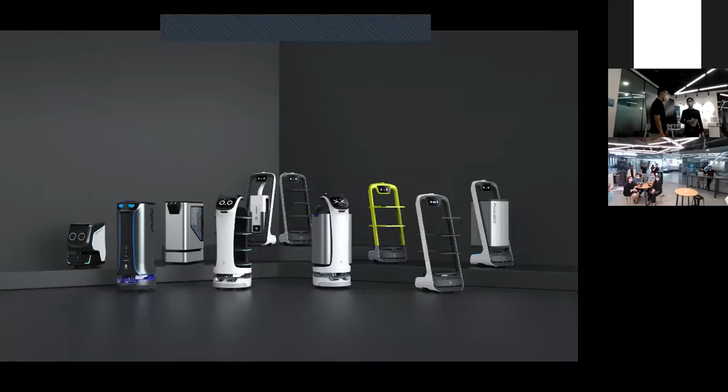So you can see that we have a few different brands we are working together with. Coming to the end of 2020, we became the sole distributor of this brand called Pudu. So these are the series of products that Pudu is producing, and I would say they're kind of a DJI for robots, because their product is super nice, and you can see the quality. I can show you later.

In the beginning of the business, we were facing a lot of questions, like customers asking, who are your customers, who are the use cases locally? Last time we could only show them, oh, in China there are so many companies using it, but coming to this year, we're proudly saying we have a lot of local brands using our products in Singapore. Especially, we have some very reputable brands like Asia Grand, Imperial Treasure, and Swee Choon using our product. Of course, Haidilao too, right? Haidilao is using it worldwide.

Surprisingly, they're actually using more than 1,000 robots worldwide in the F&B outlets. And then recently we also have some hotels starting to use our robots, yeah, in the testing phase.

So these are the few models we are focusing on today. First of all, is the Pudu Box, Bella Bot, and Hola Bot. So these are the 4 different models, and different models for different purposes. We can elaborate further later.

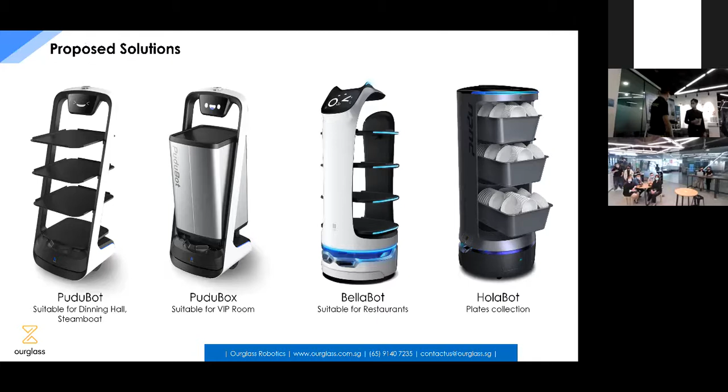As you can see, these are some of the local cases here. We got their approval, so we are able to use their brand together with our robot. I have Shin Minori, one of the first customers in Singapore using robots, and then Raffles Marina, and Swee Choon.

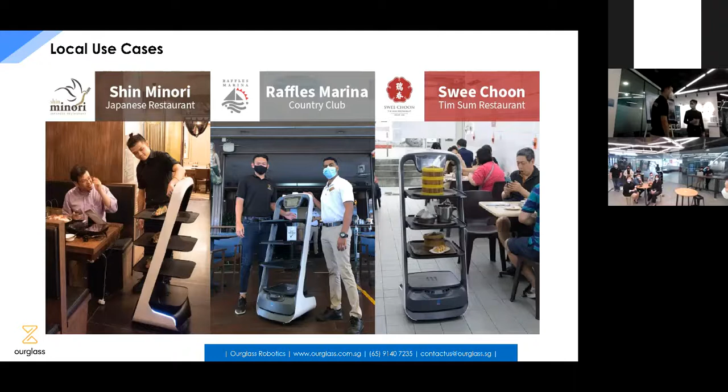So we start with a simple video, right? This is a box.

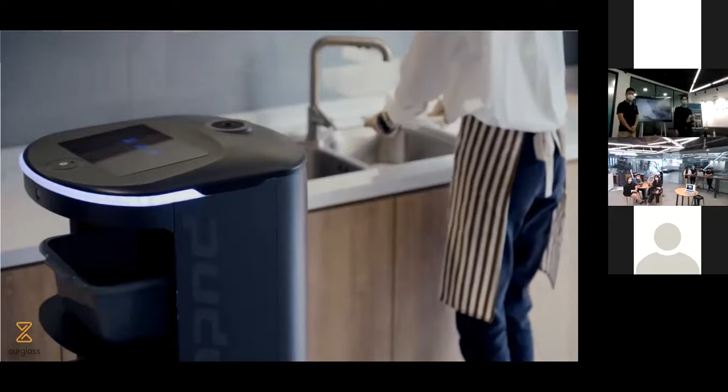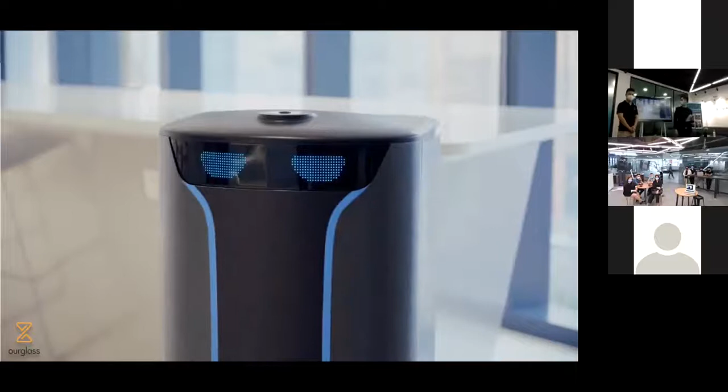This is a HolaBot. We also have a HolaBot in our office, so we can show you a demo later. The advantage of the HolaBot is that it's able to collect plates, and we can use a device, like a watch, to call the robot, so we don't have to go over to get the robot and bring it over. That's the difference. It depends on your business model and your operation processes, and then we can see how this robot can fit into your process.

We talk about one word, process. Nowadays a lot of industries talk about another word called lean. When we talk about how to be lean, the first thing we need to look at is the process. In a restaurant, we talk about a very simple process: getting the food from the kitchen to the table. First, when someone orders food, the kitchen starts preparing it. Once the food is prepared, the waiter walks to the kitchen, gets the food, walks to the table, and serves it. Most people think there's nothing wrong there.

The issue is, what the customer is paying for is preparing the food and serving the food, because that's what they want. They're not paying for delivery. So sometimes customers say, I'm focused on service, I don't need a robot. But the thing is, when your people are running around getting the food, are they in front of the customer? The answer is no, because they're getting the food. So very often in the restaurant, we're waiting for the waiter, and the waiter says, I'm busy, I'm getting the food. But the customer experiences that as, your service is lousy. That's the feedback. So how do we solve that?

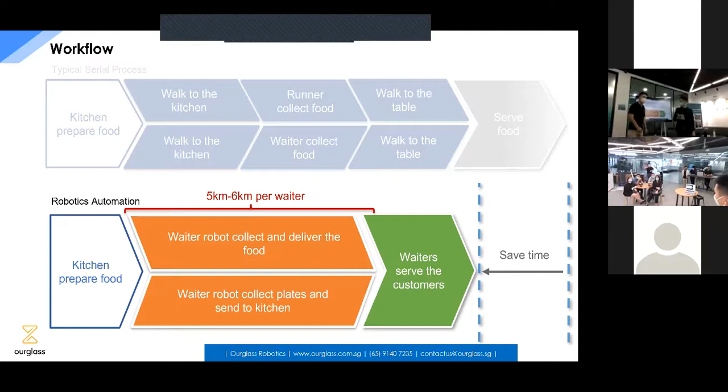We take the simple work that doesn't really add value to your business operation and get it automated using a robot. If we calculate how much walking distance a human does every day, it can be 5,000 to 6,000 meters per day. We get that automated, and then your waiter can be more present in front of the customer, and overall it's saving time. So we get it automated, so your business can be more lean.

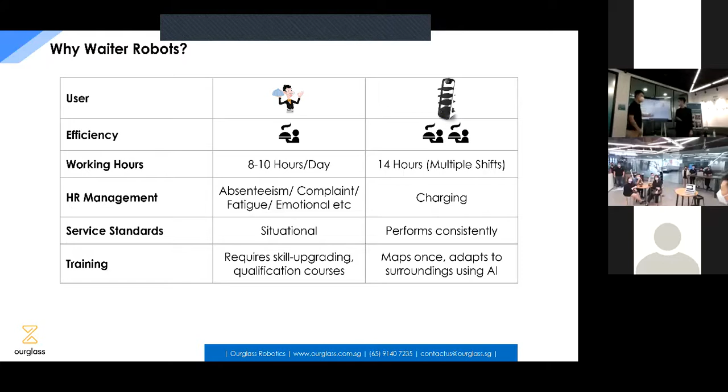If you compare a robot and a human, what's the difference? A human works 8 to 10 hours per day, and every week we have 2 days rest, Saturday and Sunday, plus annual leave, MC, and all this. If we add it up, I did a calculation - there are about 120 days in a year a human is resting, not even considering the 8 hours per day off. In terms of days, it's so long - it's like half of the working time is actually resting. Now it's about 1/3 of the year.

If you are using a robot, it naturally increases the working duration by half already. And if we consider the working hours, the robot is working way longer - you don't have to hire 2 shifts. One shift, the robot can work continuously, 365 days a year. So this is the difference.

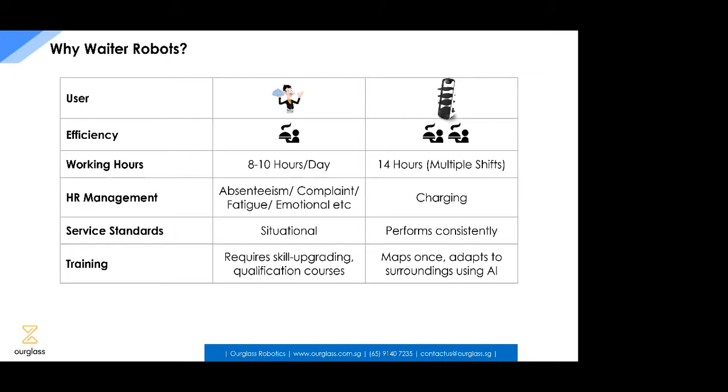And with the robot, you don't need to pay attention to absenteeism, complaints, fatigue management - you don't have to worry about all these things, and it performs consistently. All you need to worry about is whether the Ourglass service is good or not. That's all you need to worry about.

Some customers say, hey, is 8 hours enough? I'm running 12 hours. But the thing is, most restaurant and F&B businesses don't have business from 9 to 9. In the middle, you have a lot of time where you don't really have many customers, so you take that opportunity to charge the robot. Then you can continuously use it during your peak hours. So our robot is able to handle the whole day.

You can see that our robot is pretty stable. Some customers say, oh, your robot looks like a ladder - will it fall down or not? I will show you our robot is not able to fall down. It's very, very stable because the center of gravity is low - it's really heavy down there.

We can configure it to have 1 to 5 trays, so we have a lot of tray options. Sometimes when we see other robots, they always have a jam brake, and then you have soup on the robot that spills out. But our robot has 3 modes: jam brake, lesser than jam brake, or a very long stopping/brake time - meaning our robot is able to handle soup and drinks pretty well.

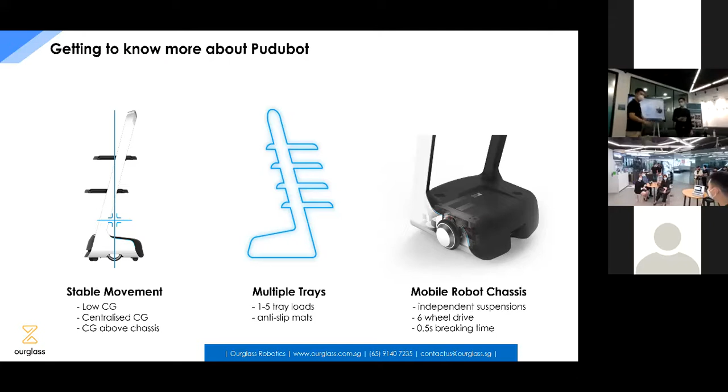Also on a relatively uneven floor - not just slightly uneven, but very uneven - it's very difficult, and no robot can really handle that job.

So how it works is our robot has two different kinds of modes. One is cruise mode, meaning the robot will go round and round non-stop - this is for example collecting plates, or delivering tissues, delivering drinks in a buffet style. The other mode is direct delivery mode, typically from the kitchen to different tables. This is the mode we'll be using most of the time.

But sometimes customers may use the robot not just for tables but also for stations, because the area may not be big enough for the robot to reach every table, or a certain dish is too hot - how can you get a customer to take it themselves? So they deliver to different stations, and a server still serves from there, so that they can save 1 or 2 runners.

So these are the different places in Singapore. We also have different cuisines - just now you saw Chinese restaurants, many are Chinese restaurants, and Japanese restaurants, and then we have Indian restaurants.

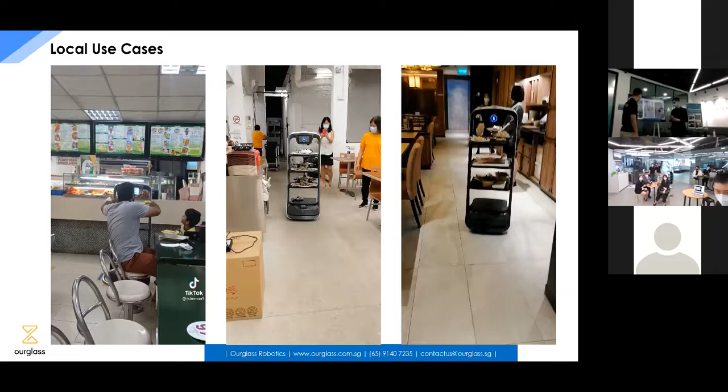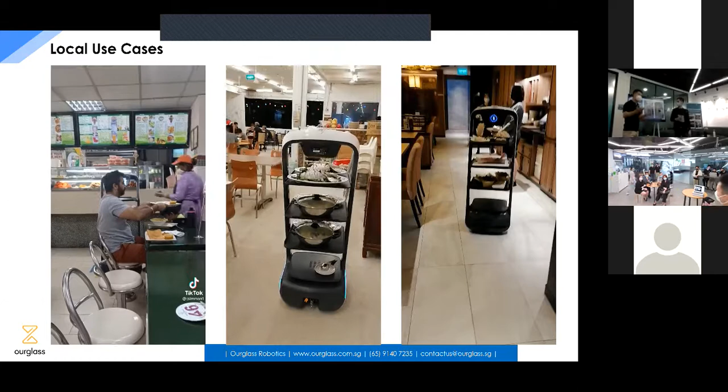Workers are not able to carry loads every day like that - it's too tiring.

This is Shimi. This is Imperial Treasure.

So some people say they're higher.

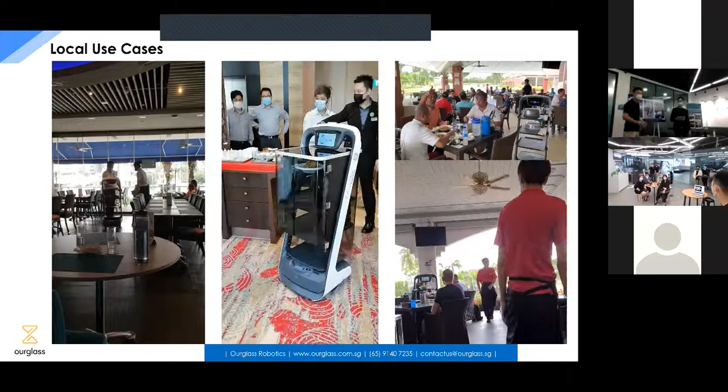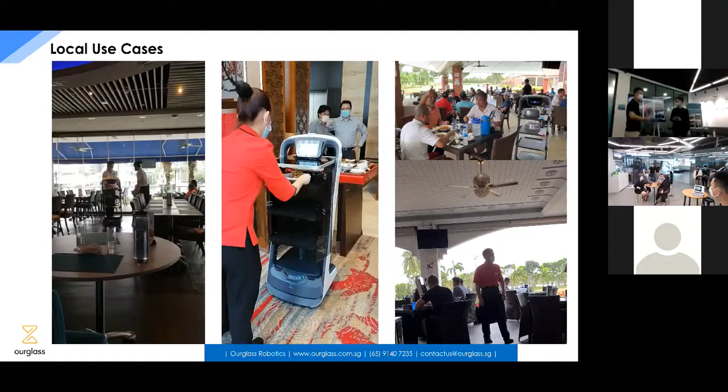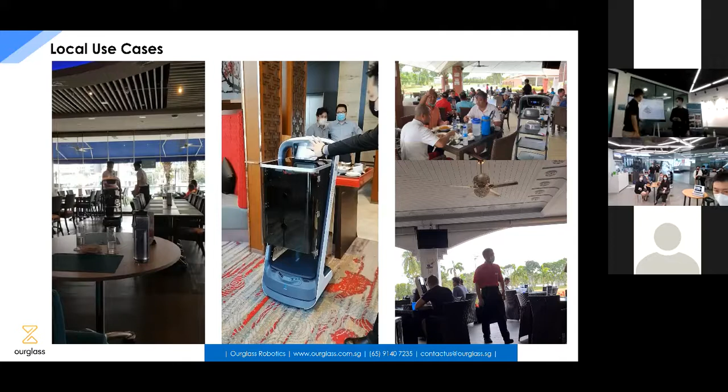Very nice, still getting the flavor. Right, so it's the same model as the PuduBot, just with the cover outside. Yeah, it's pretty nice. And we have a Raffles Marina.

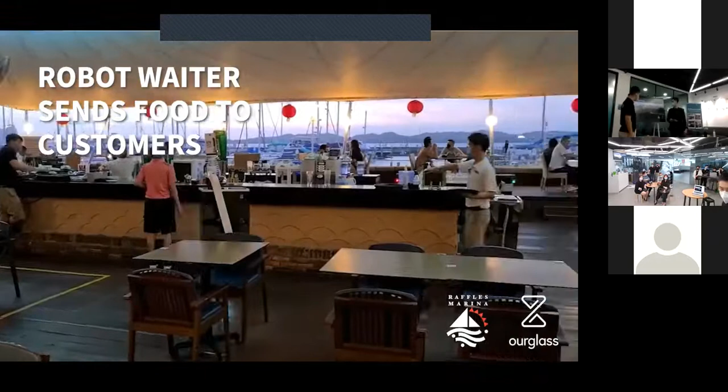See, we have two robots. We have an open door. We have a little bit of slope there. They're so used to it.

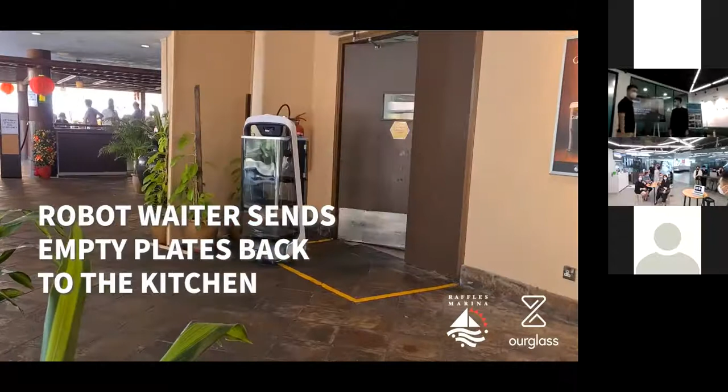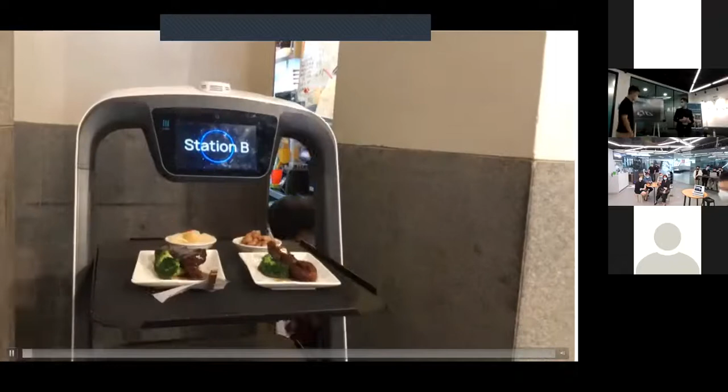So really that... yeah. And this is like Spring Court. Spring Court, I think, yeah.

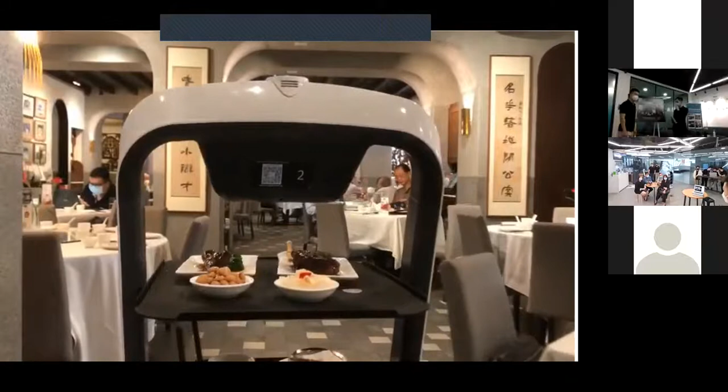They also use the... they really like it. After the trial, everyone, you know, they say oh the robot come there already. They call the robot Lucy or something.

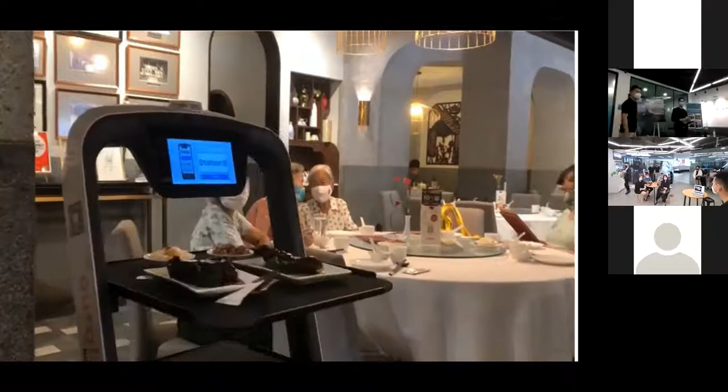Yeah, and this is the Nonya restaurant. Yeah, at the...

Right, and then you can see there are some marketing ideas. You can, you know, we work with you, you can come up with a design, right? You can decorate your design to suit your business needs, your branding needs. And of course, Haidilao is using this, like for business, like birthday, right?

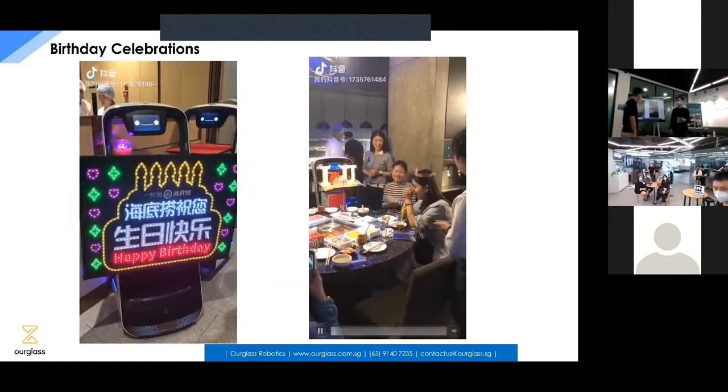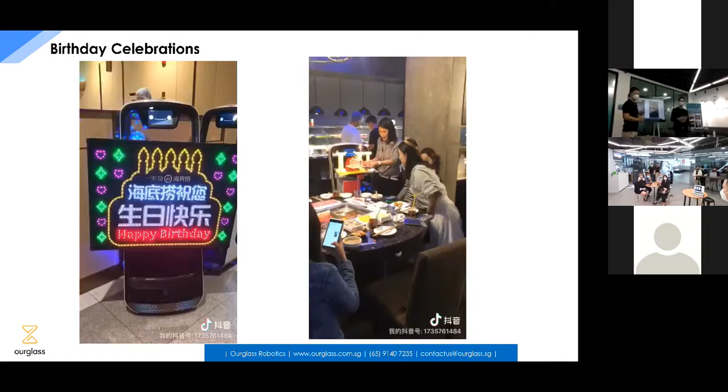Right, so at the end, you know, everyone is talking about data, right? Big data, we're using data analysis. So over here, we can also collect data because all the systems are already there. Our robot actually is a standalone system. We don't rely on cloud, so we don't need any IT infrastructure.

But the thing is, once we have data, we also have a cloud system that collects data only, meaning it's not a must to have Wi-Fi, right? So when we have Wi-Fi, we collect the data already. Then you can analyze it.

Okay, what's your real utilization of the robot, right? Some days it's not used - what's the reason, right? How many plates are we sending? How many trays, how many tables are we serving per day, right? And we can also see what are the hot seats in your place, right? So these are the data you can collect, it's already in the system.

So yeah, that's all for my presentation. Any questions? Any further questions?

Your robot is only fixed to a place you can travel, or can it... really nothing? Okay, yeah, so the question is, is the robot able to - let me just share with the online ones - are we able to travel? Is it a fixed path to travel, or is it flexible? Are we able to go to different places if there's any changes, right?

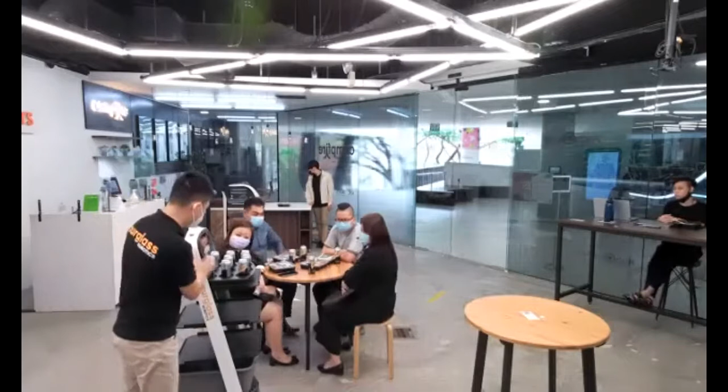Okay, so we have this robot. We have 3 trays, or 4 trays. 1, 2, 3, 4.

So some customers will put a container below to deliver soiled plates, right? Then on the first plate, I can actually put the water, and I can remove this, and remove this to carry food as well.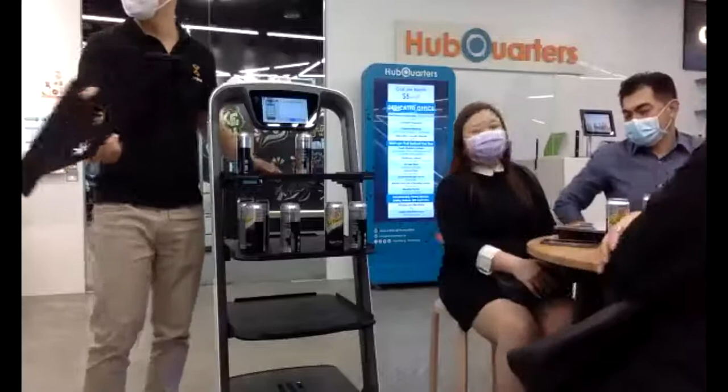It's available to you. Yeah, it's easy to remove. This is easy to remove. This is easy to remove. So I can put it there.

Okay, so you can see that our robot is very stable, and the suspension is pretty good. Why do I emphasize on the suspension? Because the robot is able to reduce the vibration when it's moving on certain floors which are not so even.

So now I'm sending the robot to get the water on the robot. I'm going to send it to number 2, let's say number 2. So you can see that interface, you just press the button, and then I'm going to move the robot, and you can see that I can push the robot easily, right? I'll show you why. This is important.

Moving on. Okay, sample number 3.

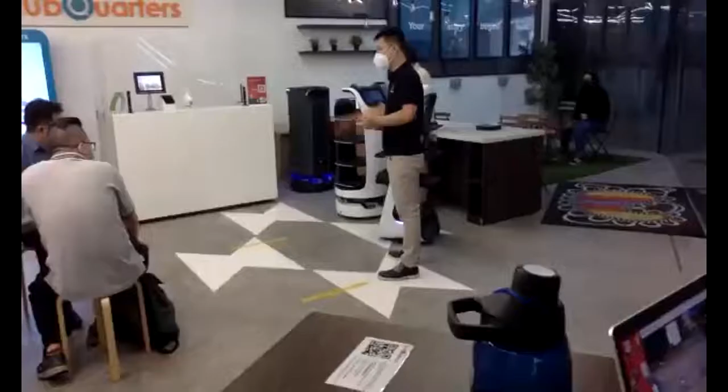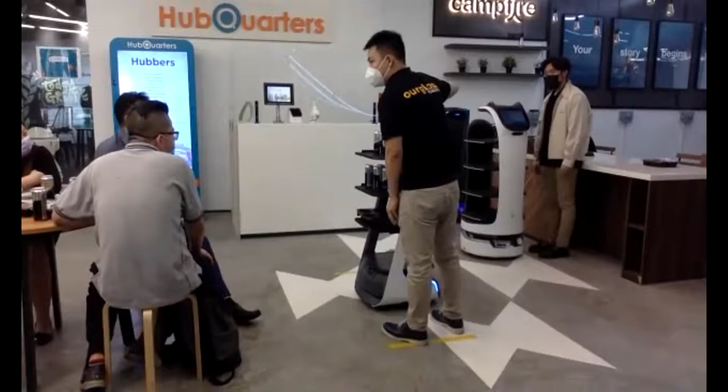Okay, now what if I want to get the robots to work together, right? For example, if I have one single row, if the robot is going and another robot is coming out, and then another robot is going, so what will happen? The robot will avoid each other, will talk to each other. So you can see over here, the robot has 'robot 2', meaning that this robot is able to see the other 2 robots, right?

So now I'm going to send the robot to number 2. All the robots are in.

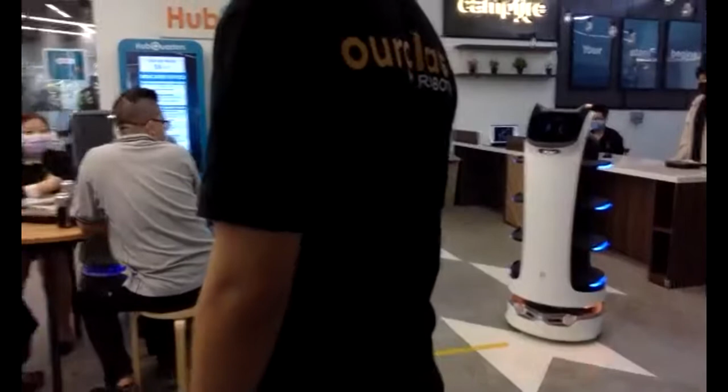See what happened to this robot? That robot is taking another route. However, you know that this robot is still here, right? It's waiting. You see this? Amazing, right? Yeah.

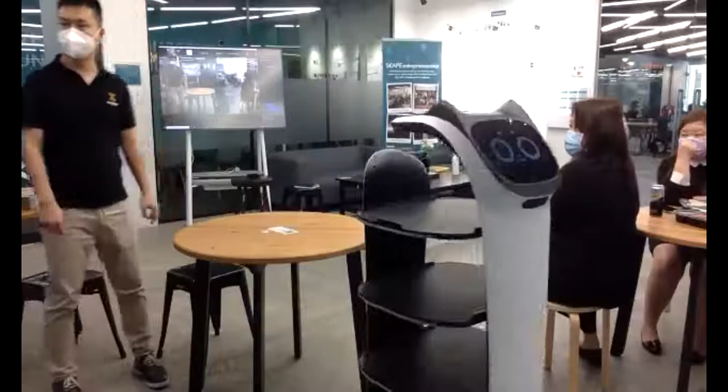Can you ask one question? Let's say when the store is having an event, and I want the robots to actually help me do a cocktail reception, walking around with canapés. Can we adjust the speed of it?

Yeah, we can adjust the speed. So we can adjust the speed at different ways of walking. For example, I want the robot to go fast and return slow, or go slow and return fast. It's possible. Or I want the robot to go 1 round, but this round, that lane is actually near the customer's place, so I want the robot to go slow and fast, slow and fast. This is possible. So we can have different ways to get the robot to work and tailor it for business needs. So even if the robot would go slow, come back slow, back to the kitchen.

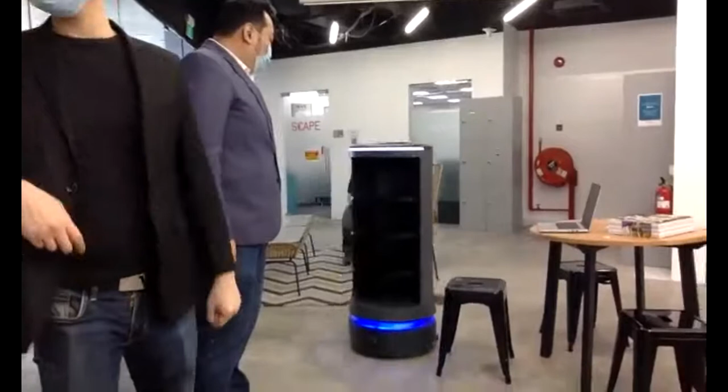Yes, it's possible. Okay. Yeah. So you can see that right now, Sean is in front of the robot, and the robot is not hitting him, right? It's working quite well. So at any time somebody is talking and happens to be in the way, the robot will swing around. The robot will not just stop, the robot will avoid you. Right? So the robot will avoid.

And then, okay, now this point is a dishwashing point. This is a dishwashing point. So after finishing, because this robot is meant for dish collection, I finish and send the robot back to its outlet, its standby location.

So you can see that these three robots are working together. They are lining up properly, right? The first robot goes back and parks inside, then the second robot will park outside, then the third robot will park outside.

So these are the different modes. We have three modes. One mode is one-to-one, meaning we have a dedicated parking space for each robot, so when you go out, you return to the same place. Then we have a free parking mode, meaning whoever comes back first will park at the priority place, then the second one and third one.

The third mode is, let's say we don't have space to put three robots, only space for two robots. So the third robot is able to park elsewhere while waiting for another robot to move out, then it will come back to occupy this space. So it's able to tailor for different kinds of business needs and layout requirements.

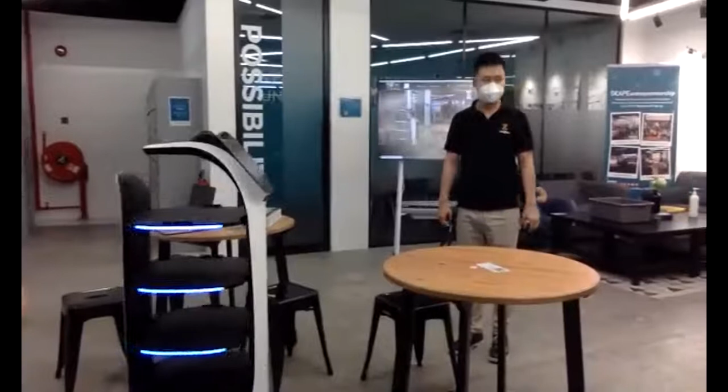So you work with places where you have very narrow spaces and you have people walking around. It's safe, especially for children. It's pretty safe. Safety is most important, I would say.

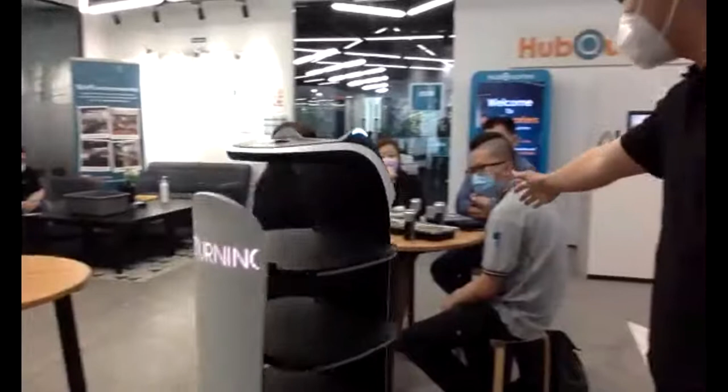And then you can see that this robot, because it has a 3D sensor, I use my hand, and the robot is avoiding my hand.

You be the client. Okay, just now there was a carpet behind it, right? So assuming the customer enters the space, enters the restaurant, this face will be shown.

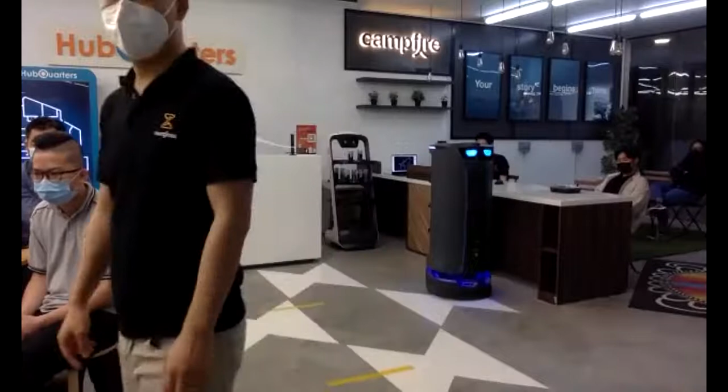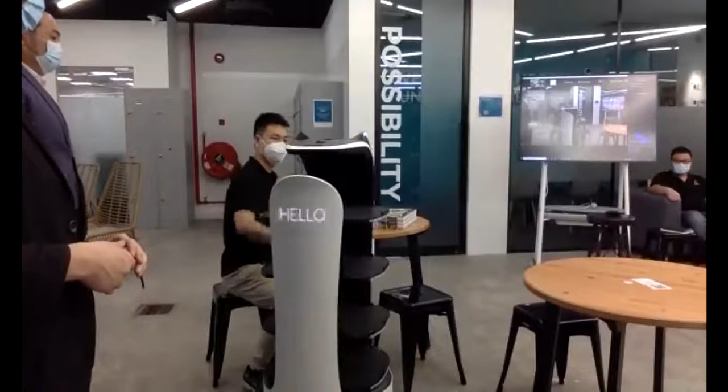So it's very good for places with children and family. So I think I want to go to table number 3. Show me the way. I just follow. Okay, thank you, take a seat. Then the robot goes back.

Oh, so this one can act independently as the reception? Yes, that's right. I think it's so friendly, so nice to use. Restaurant setting, even hotels.

So lastly, I want to show everyone about using the HolaBot to deliver plates. Yeah, you can deliver plates. The issue is, usually they will be at places with a lot of dirty plates. So what they do is, let's say I'm over here, I need to deliver the plates back to the kitchen, the washing area.

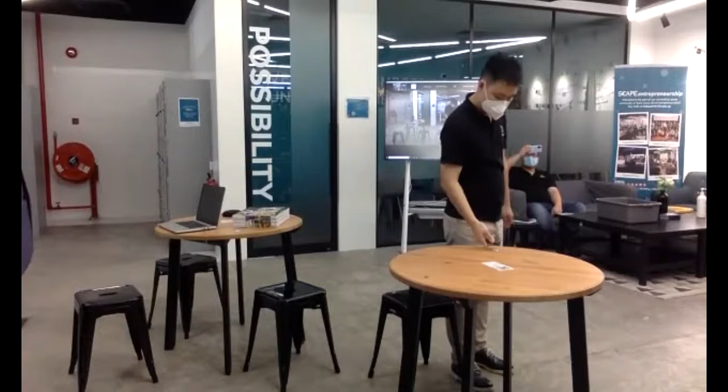So what I need to have is just a watch, and every table will have this thing, an RFID. We just paste this on the table, then I'll scan. A scan, yes, vibration. Okay, now it's showing me, right.

Then after that, what I can do is Hola. So the robot is facing me. Normally you will have a container, get a container, pack your food, and put it back. Then what I do is scan. Okay, I haven't set this up. Okay, equally press, and you will go back, right?

Okay, that's nice. So that is for plate collection, very handy.

Okay, yeah, that's all for our demo. Any questions, everyone?